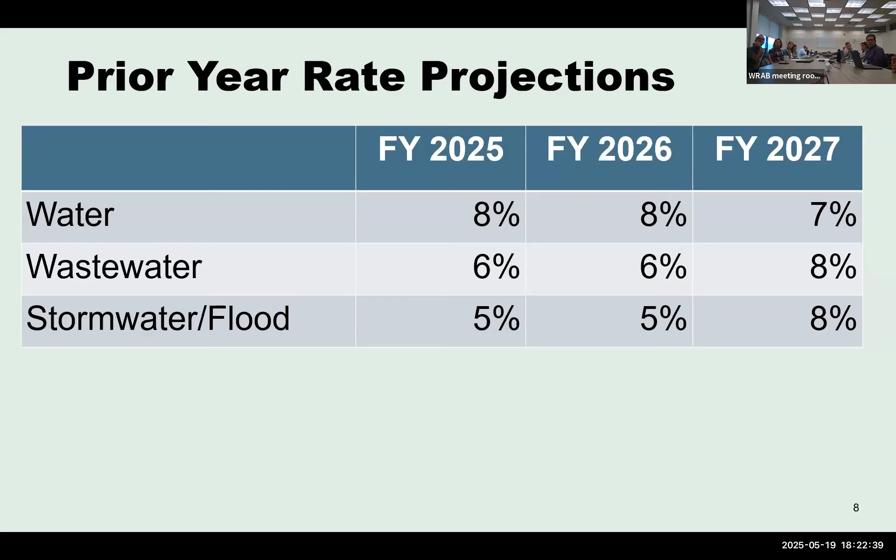All I had, are there any questions? You know what Golden's rates are? I don't know those off the top of my head, but I can look for that. Curious, since they're also.

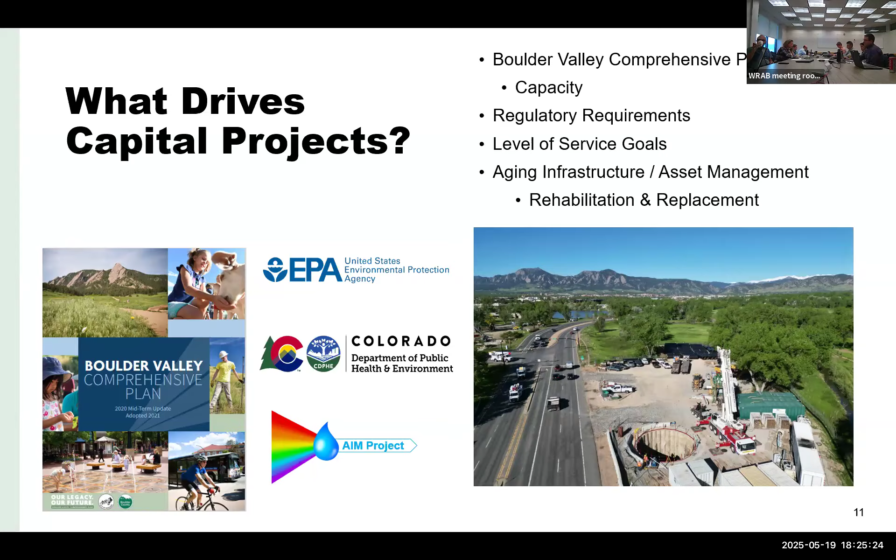The biggest driver for utilities specific projects is really that fourth bullet, related to rehabilitation or replacement of aging infrastructure based on our asset management systems.

So here we prioritize projects based on likelihood of failure compared to the consequences of failure. We also use a utility condition index score, or UCI, which you'll see on several of the slides later this evening.

It's really a cost weighted average of how much the asset costs and how much useful life is remaining, and we turn that into a percentage number. The nice thing this does for us is it helps us compare a wide range of different life cycles of assets and also costs, down to smaller diameter pipe all the way up to major components in a treatment plant. So it's just a way to try to normalize those costs.

As Joe mentioned, another way of thinking about this process is the traffic light concept. So we've got green, yellow, and red, where red is the area we want to address first because the impacts to the city are highest if there's a failure.

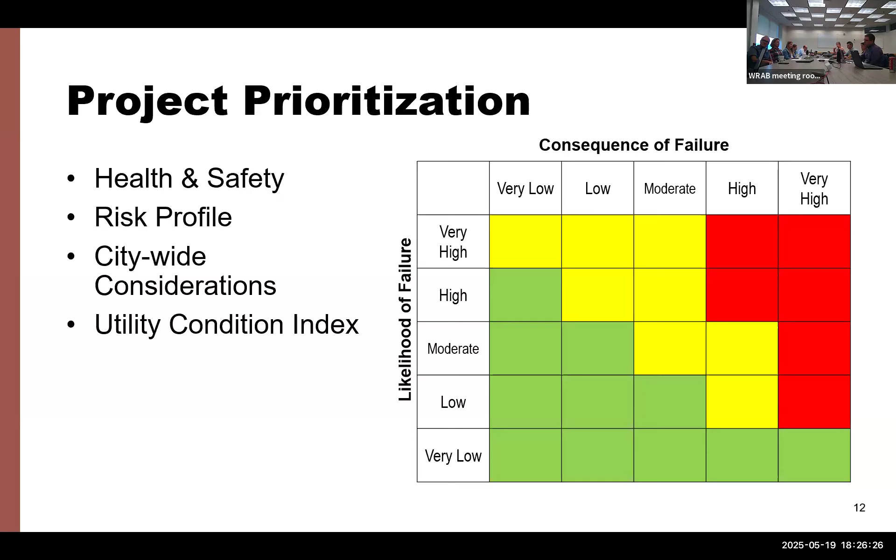The other big area we're always looking at is cost, and how we go through the cost analysis. Let me explain this figure a little bit, because it shows the various cost estimate ranges as we develop a project, or the class of the estimate - think about those brown boxes on the bottom of this chart.

Simply put, the more detail we have on a project, the more confidence we have in the cost estimate, and that reduces our plus or minus range. As you can see in this funnel, the blue decreases as our certainty and understanding of a project's cost increases. So in June, you'll see that one year recommendation for the 2026 program, but we also tie that into a longer view with a 6-year capital improvement program.

One of the things we're always struggling with is cost. As an example, the 63rd Waterline project we're going to see tonight - we did a first phase that we bid in the first quarter of 2024, and then added a second phase in the latter half of November 2024. Between that, in one calendar year, we had a 15% cost increase in the price of steel, and that was even before any of the current economic uncertainty we're seeing now.

So we're actively addressing this, and it's one of those ongoing debate items we have: how do we plan for larger construction contingencies for projects we're going to be bidding later this year and even into the future?

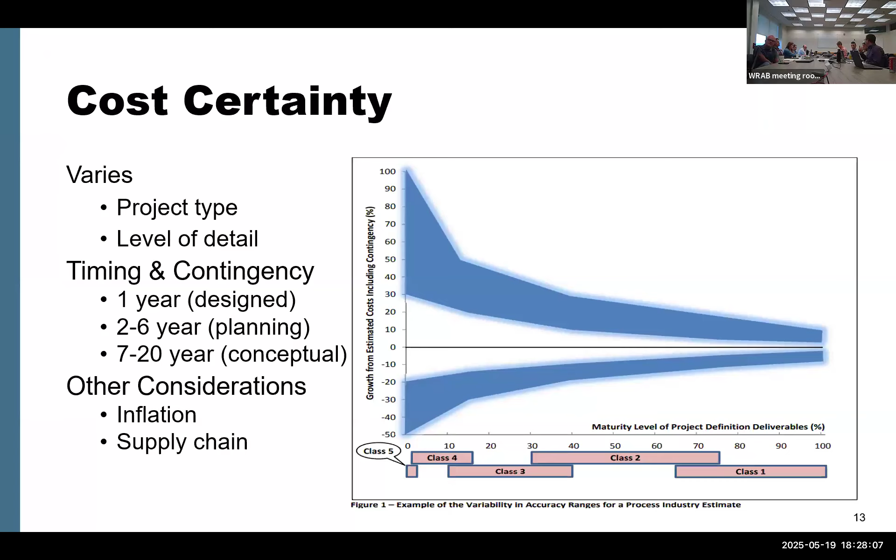So now, just before we get into the specifics on utilities, just as a very broad picture overview, I want to make sure if anybody had any questions.

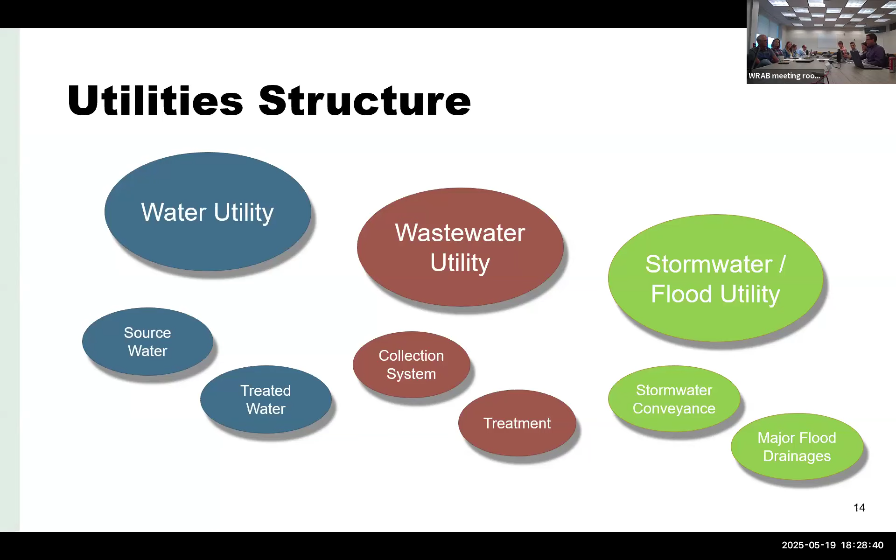Okay, so then the next series of slides, we'll stop after some of these major components. We've talked about the water utility, which is broken up into the source water and treated water system. We'll dive into a little detail on each of those, then the wastewater utility, followed by the storm and flood utility.

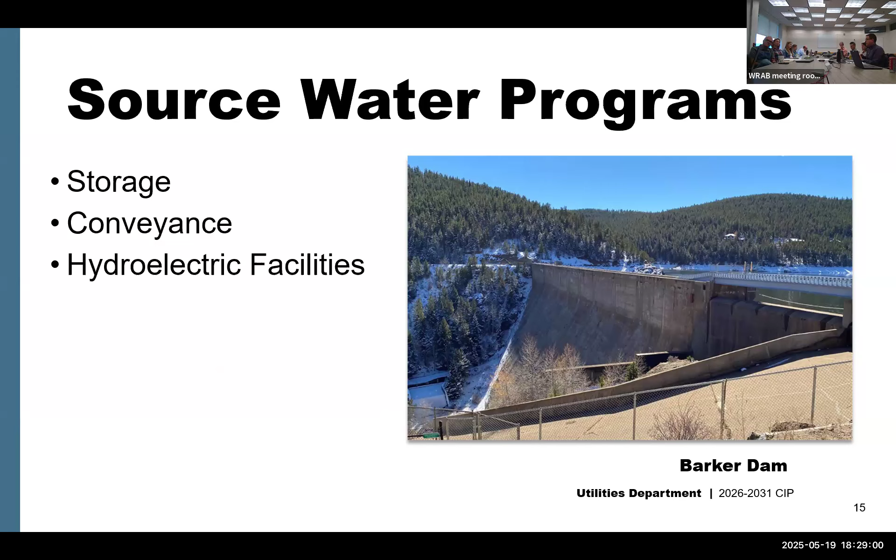So the source water system is everything that delivers water to the treatment plant. It's our storage reservoirs, conveyance either via river or pipe systems, and also hydroelectric facilities. So now we'll talk through that.

The source water system, as an overview, is made up of 15 reservoirs, and is roughly divided between 3 different sources. We have water that comes from the Colorado-Big Thompson, shown in green, that delivers water to the Boulder Reservoir Treatment Plant where we are today. Then we have 2 independent mountain water supplies in the North Boulder Creek watershed and the Middle Boulder Creek watershed. We'll step through each of those now.

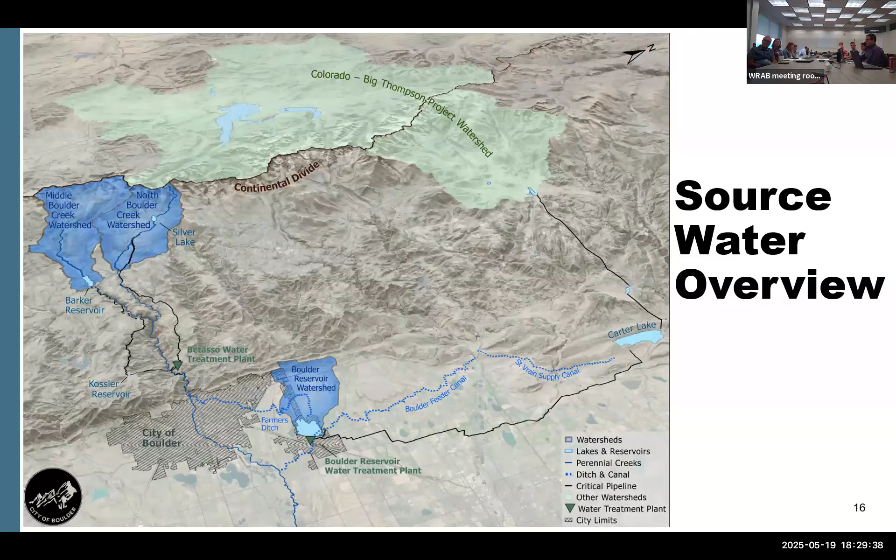So the western slope, or the water supply that delivers water to the 63rd Water Treatment Plant - this is the first example where you see that traffic light concept, where we have multiple sources to get water to the Boulder Reservoir Treatment Plant. We have the green, which is a relatively new Southern Water Supply Pipeline that we partnered with the Northern Colorado Water Conservancy District on. There's also a Boulder Feeder Canal that's a little older, in yellow, as our source.

Then the North Boulder Creek.

Question: What percentage of the water coming in here is going through the ditch versus the pipeline? Almost all of the water - we prefer to run through the pipeline for water quality reasons. We really do use the ditch more as a backup supply.

I see there is water running in it. There is water running in it because we're one of many partners on that ditch, and even the ditch as it runs into here at Boulder Reservoir - Northern Water, we're about a 50-50 partnership here at Boulder Reservoir. So they're bringing water in for some of their uses for Northern Water specifically. They have irrigation deliveries that they do for other water users in the area, and that's a lot of what we see delivered in the pipe is for our municipal use.

Is the pipeline used only for Boulder, or does it have offtakes for other users too? No, we're partnered with Left Hand Water District and a few others, and they take water off of it before it gets to us.

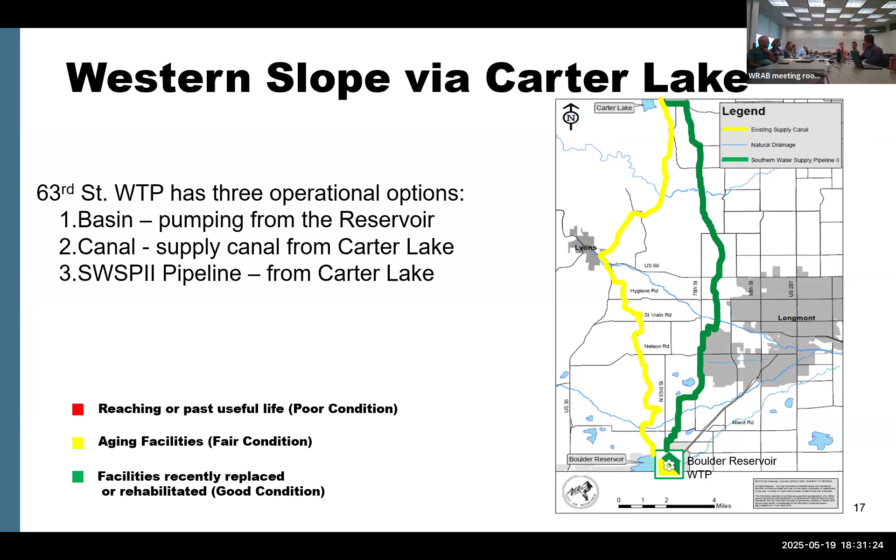So the North Boulder Creek system is a series of dams that collect water and cascade from our closed watershed to the Silver Lake Dam. Then we have a series of open channel and pipelines to deliver water to the Betasso Water Treatment Plant. We're also taking advantage of that elevation fall and generating some hydroelectric power. We've got several projects planned in the CIP up in the North Boulder Creek watershed that you'll see when we go into more detail.

Just curious, when you say past useful life, what's the useful life typically? It depends on the asset. For instance, some of these reservoirs are pushing 100 years old, and it's time for some rehabilitation. There's also the question of regulatory requirements changing, which is shifting our useful life on that. So we even have, as we'll look at in the Middle Boulder Creek system, some piping that we're actively working on.

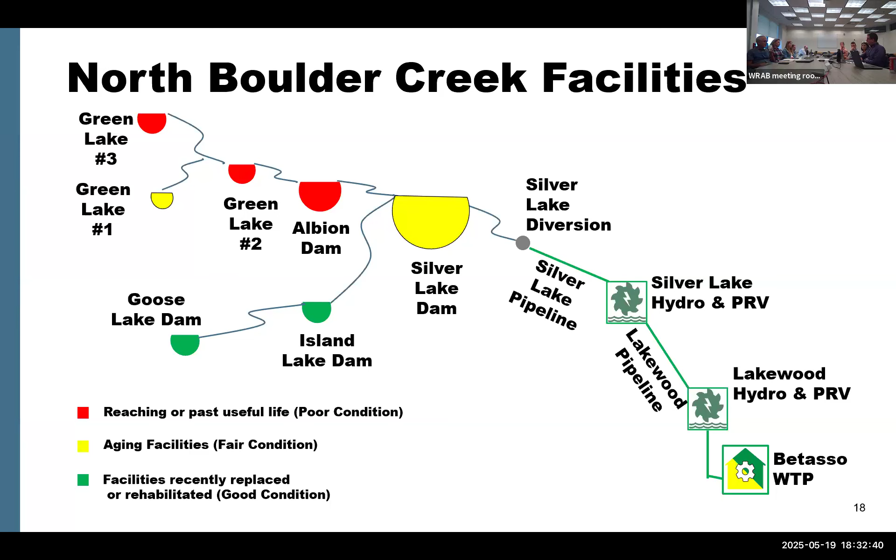On the Middle Boulder Creek system, you can see where we have the Barker Gravity Pipeline and the Boulder Canyon penstock. Those facilities are actually both over 100 years old. We're in a multi-year project on the Barker Gravity Line, where you can see the green and the red - we've got another 4 years and we will have completely rehabilitated that pipeline. Then we'll be pivoting to the Boulder Canyon penstock after that.

So there's this mix of, okay, it's really old, but is it still working for us? We've got definitely several things where we're doing additional analysis on those facilities. This is always a big juggling act. As we've talked about, we've got a lot of first page projects, and that's the biggest priority on that first page that we need to start getting after.

So that's the Barker Gravity System. Probably the biggest thing on the Middle Boulder Creek system is Barker Reservoir, the primary reservoir for that system. We're continuing to look at upgrades and coordination with the state engineer, making sure that reservoir stays safe.

There's still 4 years worth of work on the pipeline. It's roughly a 10-mile pipeline, and we're rehabilitating about a mile a year. We're doing that in the middle of winter because we need the water for the critical water demand season. So the team came up with an ingenious way to get in and work on it in harsh winter conditions and get it back up and running, versus taking it down to fully replace it, which would mean not being able to use that pipeline for multiple years.

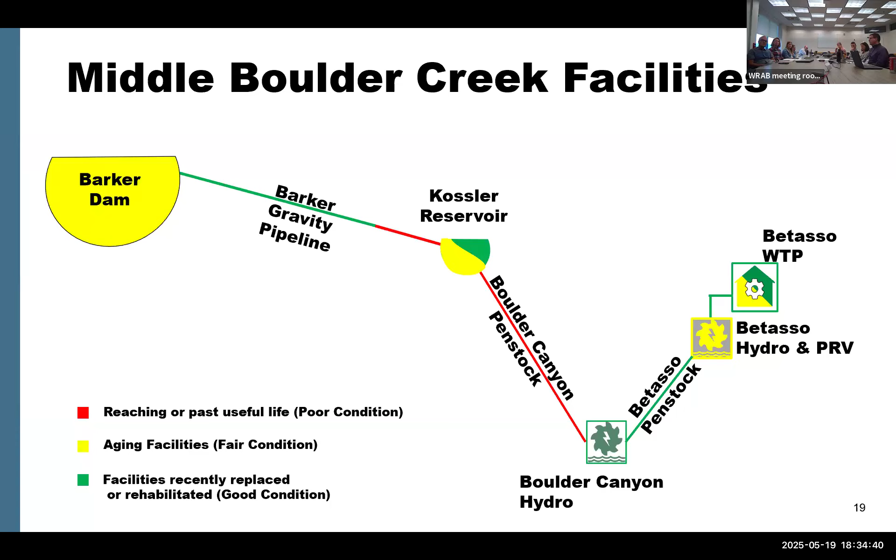We've done questions, but I just want to pause before going into the treated water system. Any other questions on the source water system?

I might make a comment while they're thinking of questions. On the first slide you showed, the Northern Colorado system, the pipeline that's relatively new, and then the canal system, those are Northern Water assets, not City of Boulder. So I just wanted to make sure everyone understood that. We pay into them, we have contracts with them, we pay into annual maintenance, so it's a little different than funding a big capital project on our own infrastructure.

Did we fund any of the original capital costs in that pipeline? We did, yeah. We have a contract for the initial portion of the payment and then the maintenance thereafter. So all the different users contributed to the capital costs originally, but it's owned by Northern. We're paying in based on our share of the capacity of that pipeline, for just the maintenance. We'd do the same thing for the capital cost and then also pay an annual maintenance fee. As part of the budget process, it varies, but we're coordinating with Northern on what those anticipated fees are.

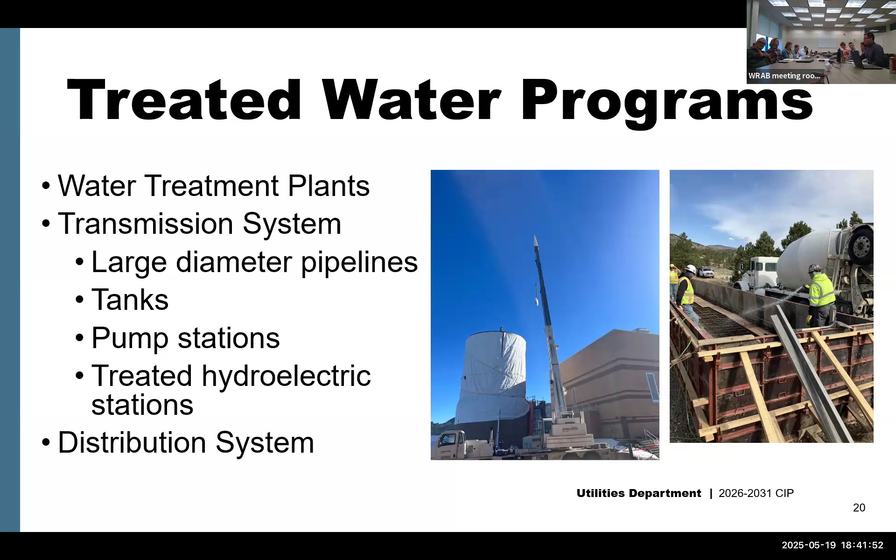From the treatment plants, we have two treatment plants here in the city. On the east end of the city, where we are sitting right now, is the Boulder Reservoir Water Treatment Plant, or the 63rd Water Treatment Plant. We kind of interchange the two names, and that's where we're bringing in all that water from the northern system. Then we have the Betasso Water Treatment Plant, which is west of the city at the Betasso Preserve. If you've been up there, the treatment plant's really on that end, and that's where it collects the water from the two Boulder Creek drainage systems.

I'll ask, the water treatment, this is to make it suitable for potable water? Yes, this is correct, this is potable water treatment. And then we'll talk about wastewater treatment here in the next series of slides.

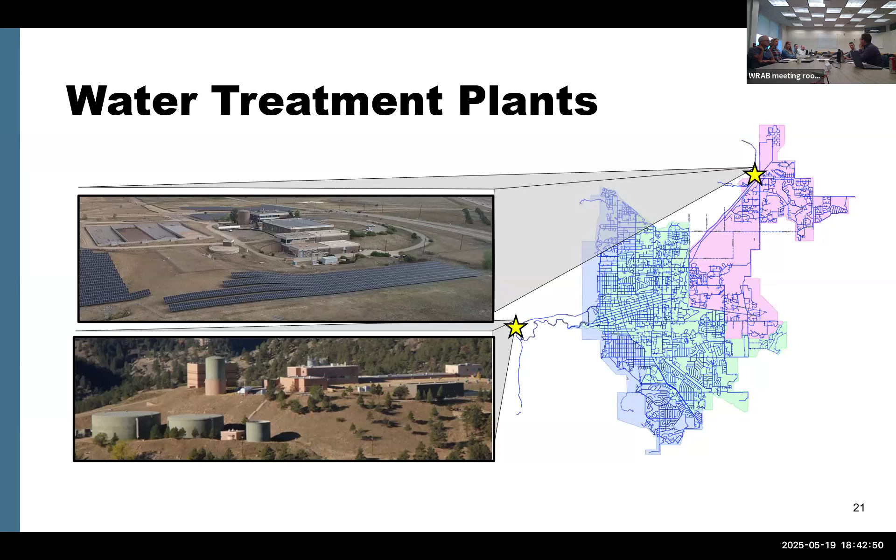So lots of things on this one, but it's the Boulder Reservoir Water Treatment Plant. A couple of big things to highlight: in the last years we did upgrade the main power and the high service pump station. You'll see those particular ones, in the middle of the slide, are now green because we've done that major capital improvement program. Then you'll see the areas in red that we're looking at, which is the backwash tank, the campus building and support facilities, HVAC, roofs, those sorts of things, and also the chemical feed system that are approaching the end of their useful life and it's time to do an upgrade. So we'll see some things here in the next year, and then some other things in the outer years in that 4 to 6 year range in the capital improvement program.

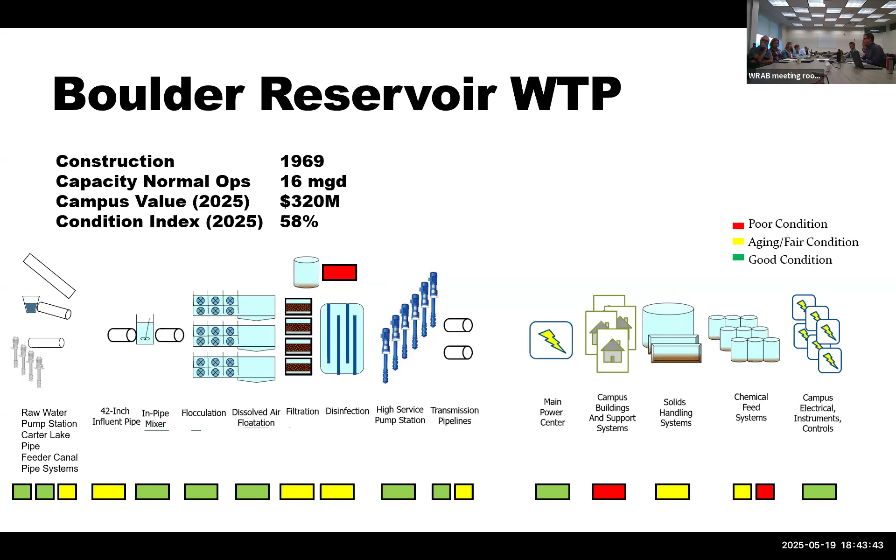Does the utility pay for those building upgrades? We do. We are responsible for the maintenance on our buildings, and we do work with the facilities team. So that would be one of those transfers that Steph talked about to other departments. We are still paying our bill to the facilities department when they are helping us out on projects like that.

What about the solar outside? What's powering this? The solar outside is a separate solar contract, a power service provider contract. So yes, it helps with this facility, but from the accounting side it's more going to the city and then kind of selling power back to the utilities department. Did I get that right, Stephen? That was certainly an area when we did this big electrical job - it was definitely a coordination issue on how we either maintain or what we have to do to shut power down to that solar field while we were doing all that work.

The Betasso Water Treatment Plant is in pretty good shape because we did some upgrades in 2017, but right now we're actively working with contractor consultants on some issues on the backwash tank, and we've just completed some work - that's why you see in that backwash tank that kind of red-green split. We're also looking at the disinfection system, and in a little bit later years in the capital improvement program we're looking at upgrading the chemical system.

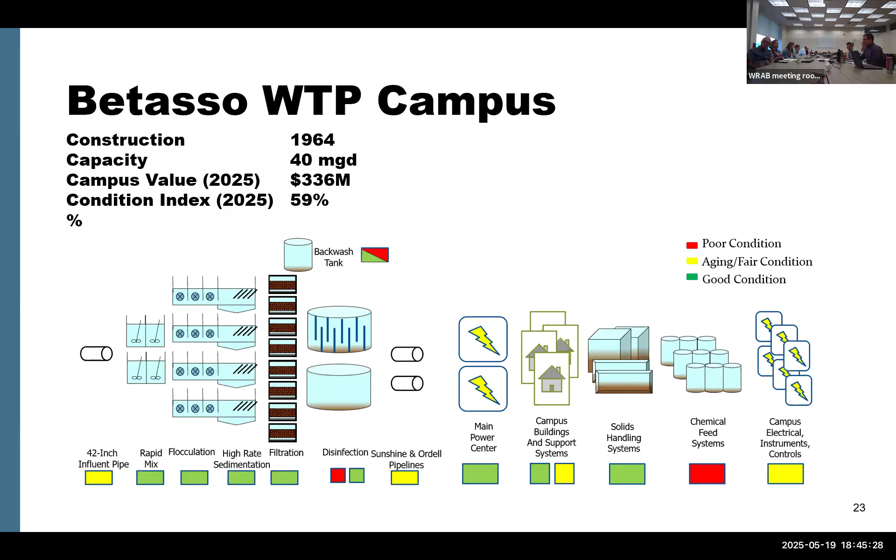Then the transmission main system - think the large diameter pipes - is really an area we're actively looking at right now. You look at the red box with the 70 miles of large diameter transmission pipes that we have. That's what we're going to look at tonight. This is our first big approach, really, after completing a transmission main study, toward capital or pipe replacement.

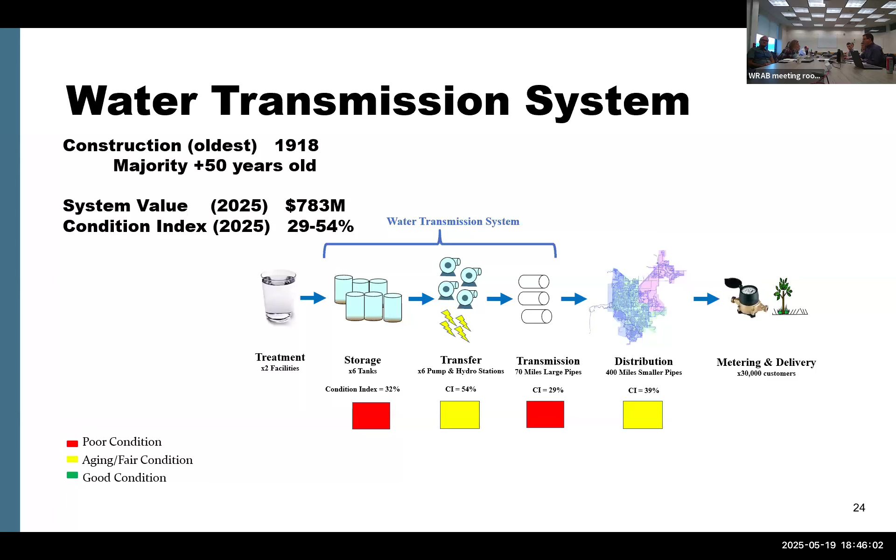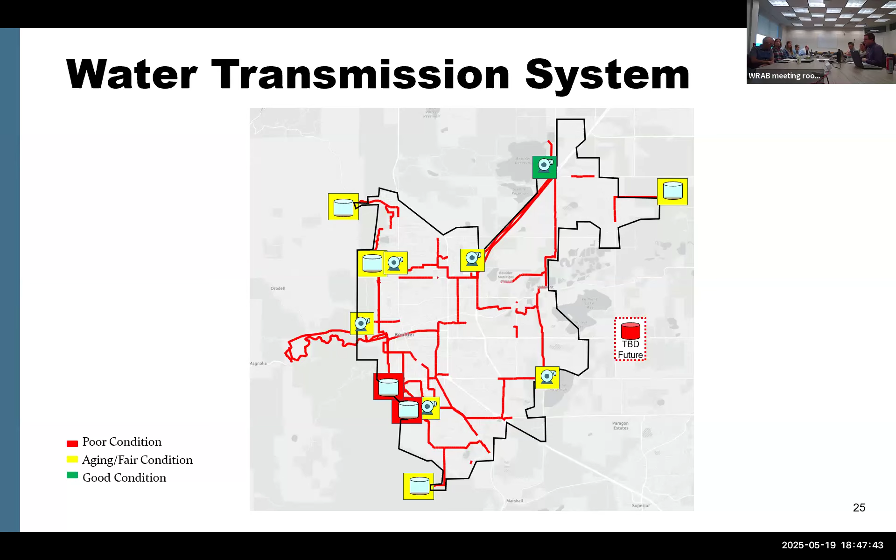I know we've been asking questions, but maybe any other questions before we move on to the wastewater system? Just maybe something.

Fires and ability - especially like in LA - the ability of the water system to deal if you really got a fire and you're trying to put out multiple mains, these systems aren't built for containing a lot of fire, right? That is correct. We have a system where we can produce a large volume of water, but it's a matter of - we've even worked with the operations folks on continuing to move water through it. But if we're ending with a Marshall fire or a fire in LA, the system is not designed to handle that sort of massive fire situation.

That would be looking at really going through and looking at upgrades to this entire distribution system. The biggest issue is you'd have so much water that you can only sit in the system for so long once you add chlorine - you'd age out all your water before you could get it out of the system. Thank you, Dan. That's the other side of the coin, that water quality issue - it's a non-starter. Yeah, that's why nobody designs that way.

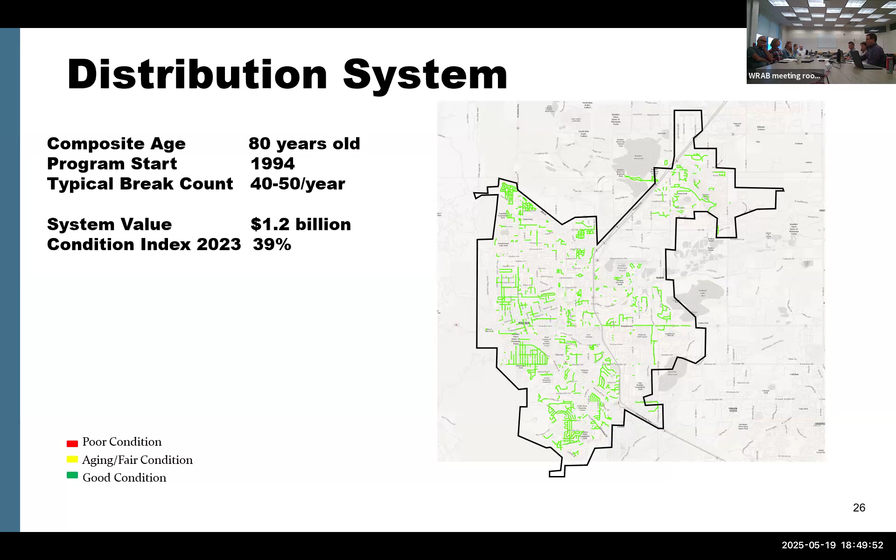So in the wastewater system, wastewater is really made up of two main components. It's the sanitary sewer collection system, which takes the sanitary sewer from everybody's home and delivers that for wastewater treatment at the Water Resources Recovery Facility, or what we call the WRRF.

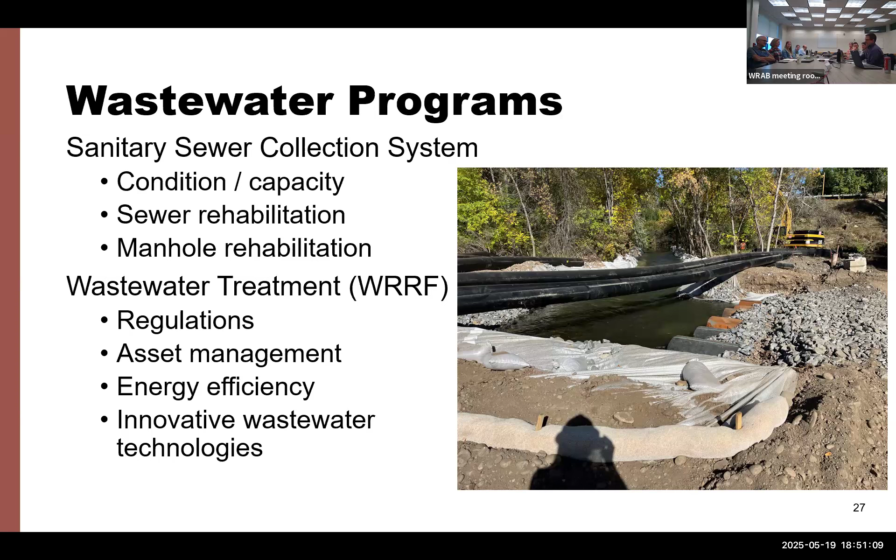We looked out—yeah, it was dark. I think we did the headlight projection. You got lost. It was a beautiful sunset. We were out by the western... no, we came here. Yes, we'll try to hustle tonight so we can get out before it gets dark.

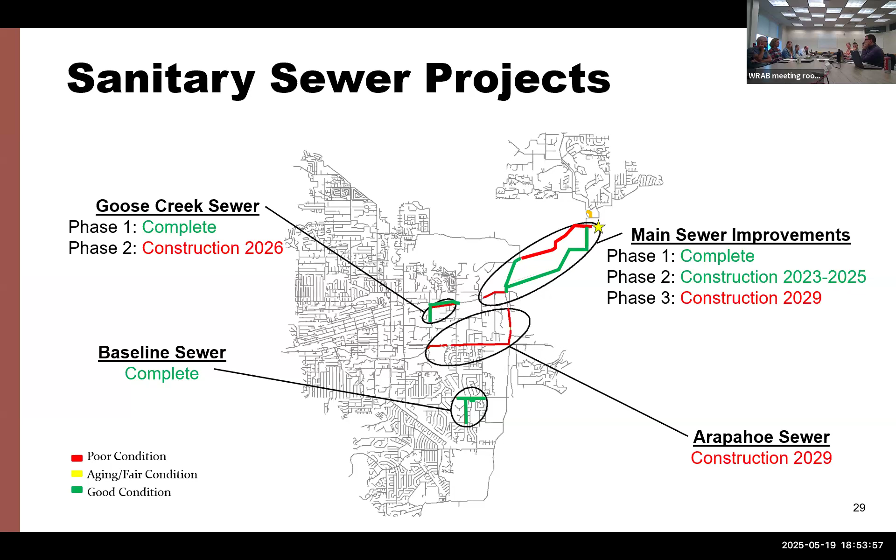When you make decisions about which neighborhoods and how to structure the phasing, is that based on some prioritization process, and also consideration of equity, where all the projects are happening, and traffic flow? We didn't mean to overlap our project with CDOT's—we didn't know CDOT was going to do that out here, so that was unintentional, but yes, we are attempting to coordinate. Particularly on the sanitary sewer lining program, a primary portion of that project is looking at what has the largest inflow and infiltration issue. But as we rolled out the equity program, we're overlaying that equity concept and making sure we haven't missed an area that hasn't been addressed from an equity lens as well.

So that's particularly on a multi-year project like this one shown here, we can look at it and ask, are we looking at it through that lens as well? The 94 distribution system that we started in 1994 has been scored by a point system since its inception.

That will be the water replacement. Yeah, and the whole time I've been here, we've done roughly 4 miles a year of pipe, and we did that based solely on the score. I didn't even know where the pipes were; they were just the score, and we could place those pipes.

That raises a really good point. There's coordination with the city roads, streets and roads folks, timing your project so it lines up with other projects happening in the same location, but also knowing what CDOT's gonna do, knowing what Xcel's gonna do. There's another level on that layer of priorities, an equity lens, and other citywide benefits we're considering. So we're trying to fit all of those pieces into making those project decisions.

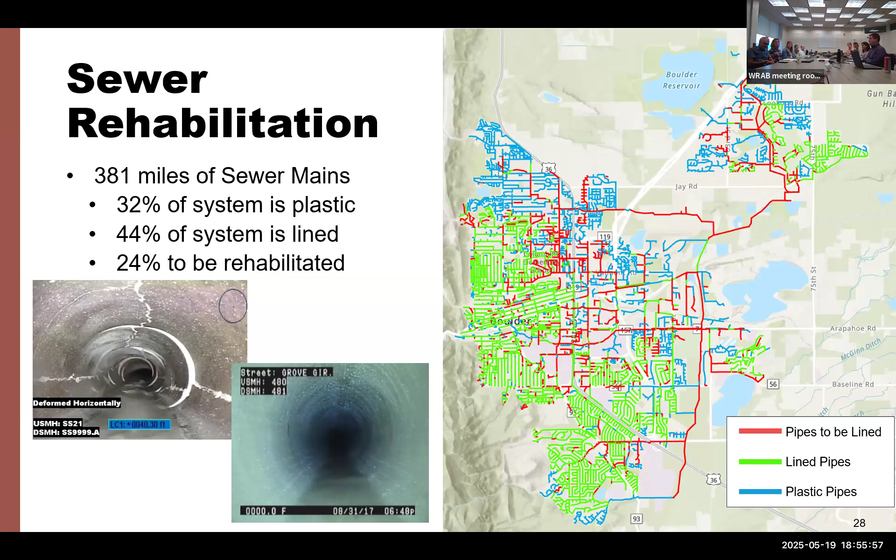So again, another one of those cases where we're looking at conditions and trying to pull levers. As Joe has talked about in the past, it's like the giant music mixing board we look at to decide which projects we're doing, when, and how that influences things.

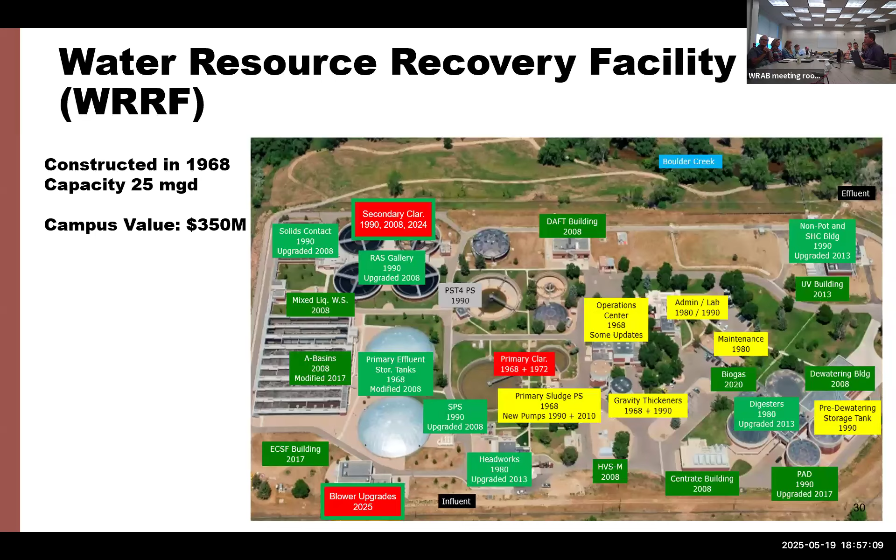One thing that's really stuck with me, I'm going to relay this before we go into the storm and flood program, is that when we did the comprehensive storm and flood analysis, a major consideration was: do we have the financial capacity to do it? Do we have the staffing capacity to do it, and the public willingness to advance a project? We don't want to be doing construction in one area year after year, because of that public capacity.

Did anything happen with the clarifiers last year? We were working on some of it, yes. Let me let Chris explain, since he's got more detail.

As Deputy Director of Operations, I can share a few things. We have primary clarifiers and then secondary ones. The primaries did get a fairly significant rehabilitation effort to extend the useful life of those assets. There will be more work to do in the future, but it was largely dealing with coating, coating on the submerged steel.

For the secondary clarifiers, one unit got replaced completely. There are two more that need to have their mechanisms replaced, which is what we're still planning to fund and pursue in the next couple of years. So 2 out of the 4 secondary clarifiers are in really good shape, 2 are not in good shape, but we have active plans to address that.

Then maybe pivot to the last utility area, the stormwater and flood program. It's made up of stormwater conveyance, thinking the pipes in the streets, stormwater quality, and the flood drainage way system. I really wanted to show this example, the rain garden at 15th and Walnut near the post office downtown. This project has dual benefits because it increases local stormwater drainage conveyance, but the rain garden also delays that water as it goes into the storm sewer system, so we get a water quality benefit as well.

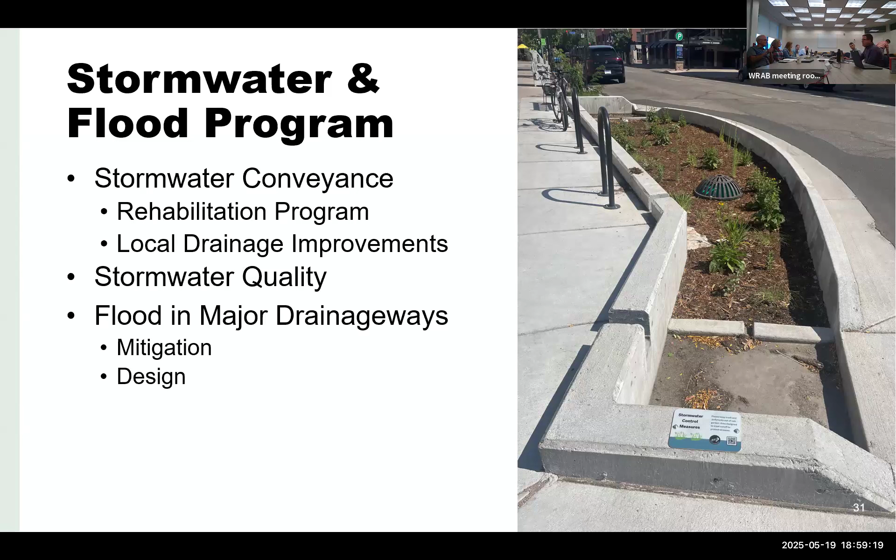So that's an exciting project that just came online recently. For those in Boulder, there are some private rain gardens, but this is the first utilities-supported one. We're looking at other areas for how we can do that, because it also involves a partnership with the property owner on some of the maintenance items and other things.

In the stormwater system, I wanted to show you a map of the diverse stormwater system we've got. One point is we're in year 3 of a condition assessment program where we're looking at the condition of all the storm sewer pipes, which has driven us into one of our local drainage improvement projects.

But the big point on the storm sewer system is our level of service. A lot of Boulder, in residential areas, is not able to handle that 2-year storm, or that small local storm, versus non-residential areas where we're looking at a 5-year storm. So going forward with upgrades to the system, both in capacity.

I'll have to get back to you on that. I can talk to my storm sewer team about the 5-year capacities too, and I'll bring that back in June. It varies from drainage area to drainage area. We have routine thunderstorms all the time in Boulder, but it's the bigger events where you really start to see flooding and accumulation of water that we're talking about.

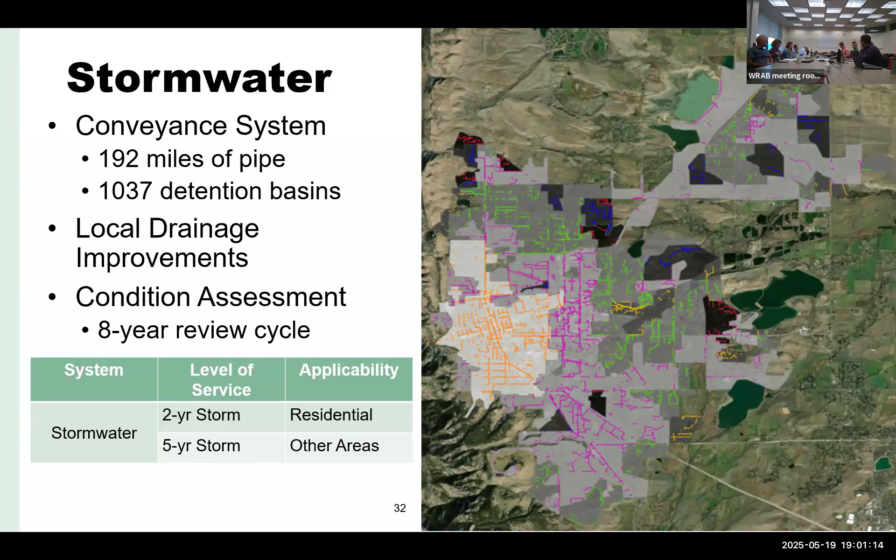Then the stormwater quality program works to address water quality within the city limits. The program not only seeks to comply with state water quality regulations, but to educate the public and improve water quality through better understanding of stewardship. That's led to things like the rain garden.

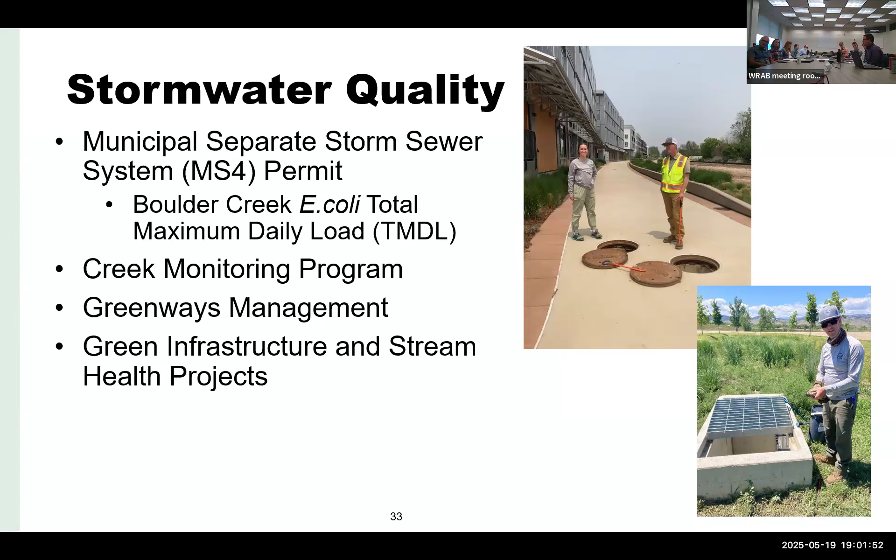We also address various water quality monitoring and special studies, such as in creeks. One of those is a multi-year implementation related to the E. coli total maximum daily load implementation plan on Boulder Creek.

Then the flood program is designed around those major floods, which either collect floodwaters created here in the city of Boulder, or come through the 16 major drainage ways that deliver water into the city, which we have to convey through the city.

But since Boulder was established before modern day floodplain regulations, there are physical limitations we have to deal with, even in some of these neighborhood drainages. We're putting in the largest practical stormwater conveyance that we can.

Is that the historic 100-year flood, or is that projected? Right now, a lot of our mitigation plans are based on that historic 100-year flows. We are looking at addressing larger flows, but again, it hits that practical limit just on the cost balance.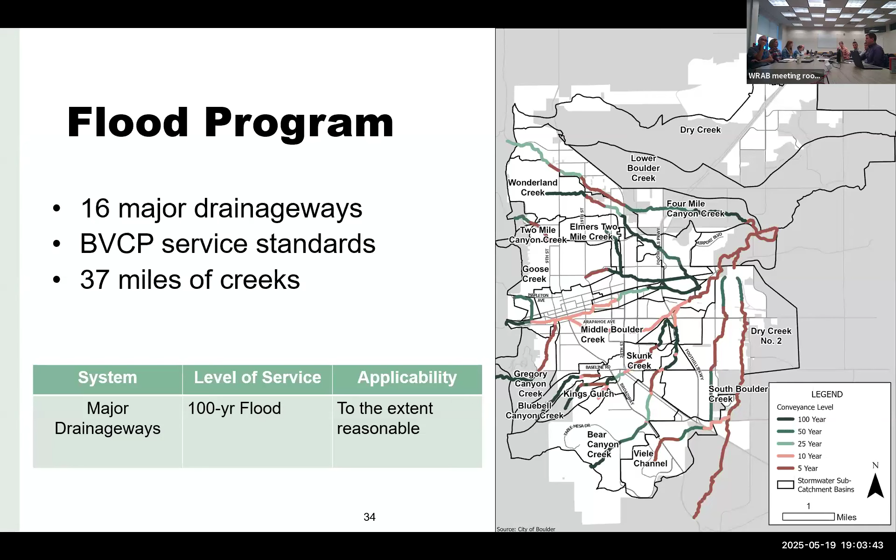With that, unless there are other questions on the stormwater and flood system, I'll hand it over to finish us off. So the city has a racial equity plan, and that topic just came up in the conversation a few minutes ago. We have the capital improvement program, and every department has a work plan, which could include operational items not related to capital projects. We develop a work plan every year and go through it, tagging things that are candidates for applying the racial equity plan and that racial equity instrument.

Some of the things we do in utilities are system-wide and benefit everyone. And then there are other things, like I'm really proud of the work the team did on the comprehensive flood plan, where we changed the way we prioritized projects with equity in mind. The way it was done systematically in the past used to point projects toward the most affluent neighborhoods based on property damage values. That wasn't really the intent of it, but it was all based on benefit cost ratio.

So this year's work plan has a lot of things flagged.

We have a billing system upgrade. We're looking at starting on water budgets and a rate study. Those are the types of things that are really a candidate for that approach in utilities. And the comprehensive flood plan, the water efficiency plan, the drought plan that the board weighed in on in the last few years are all things that the tools from the city's racial equity plan were applied and made a difference in the way we do things.

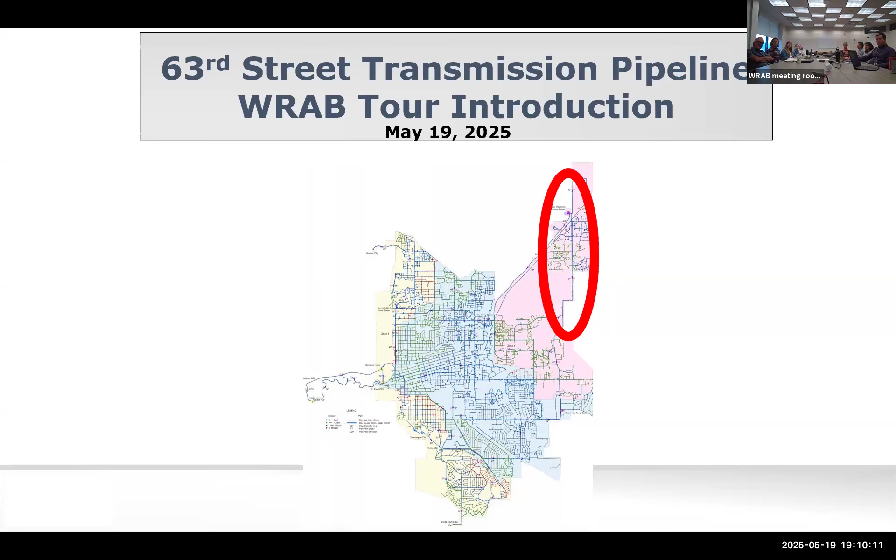Basically, to your question earlier, we really have a data-driven process that is risk-based and future-focused. So the projects that fall in that red category are of particular interest, but on top of that, if the pipe is too small for current needs or current customers and how we would wish to run the system, but also too small for the future. So you can kind of see how some of these things really stack up, and this red circle is one that stood out. So happy to have a good project here.

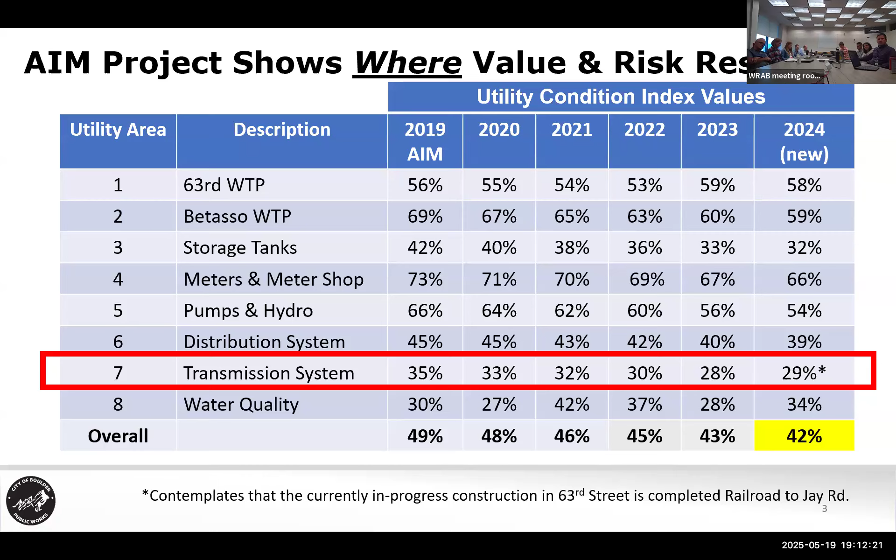And we're just really happy that we have progress to show tonight for this. But again, drivers are not just public health and safety, but there is a big component of this that is aging infrastructure driven.

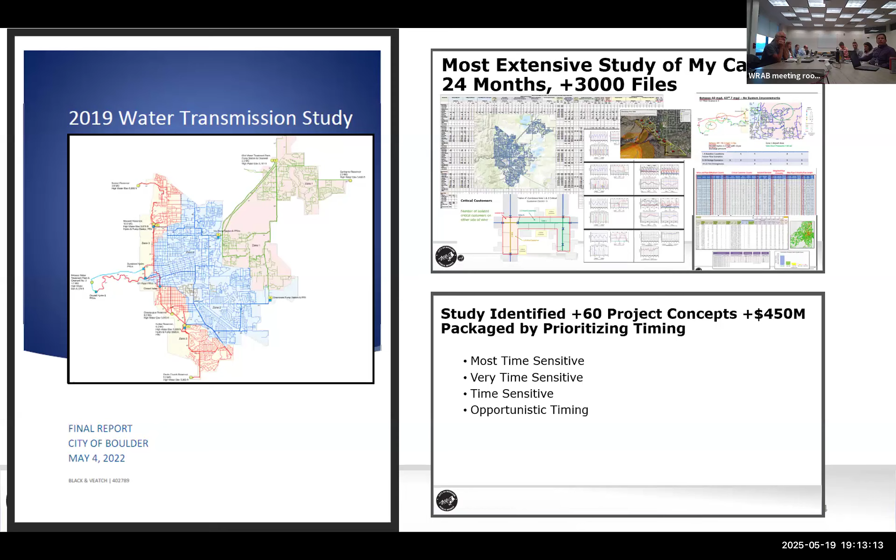Part of the data that went into this was our asset management program, the AIM program. That also led to a deeper dive because these systems can be so expensive and complex. You want to really be certain about the outputs and inputs going on there. For the transmission study itself, there was an extensive 2019 water transmission study, the most extensive study of my career, taking more than 2 years. There were over 3,000 files, hydraulic modeling, you name it. Those are just examples of the type of data, but when we say it's data driven, there's quite a lot of data that goes into coming up with a recommendation.

Reinvestment on the transmission system and the results of the transmission study is active right now. We looked at the cover slide with the red circle, but there are 2 others that have also been active and are anticipating construction in the CIP that we'll discuss more as a team with you next month. The Kohler tank has a key pipeline that goes from the tank itself down to Broadway, near the NOAA facility area of town. These are really critical pipe systems that convey large volumes of the city's water use. Related to that, once the pipeline gets to Broadway, it goes along Broadway, which is part of the same pipe vintage and is also in need of upsizing. So that's the steps that have been active and engaged to date.

I can take over from there. The number 2 you see up there is actively being designed as we speak, one of the projects I'm working on. We're at roughly 90% design on that, and I think we'll be bidding it this coming spring. That's estimated to be around a $12 million project, and it'll be 2 24-inch pipes from Kohler tank all the way to Broadway.

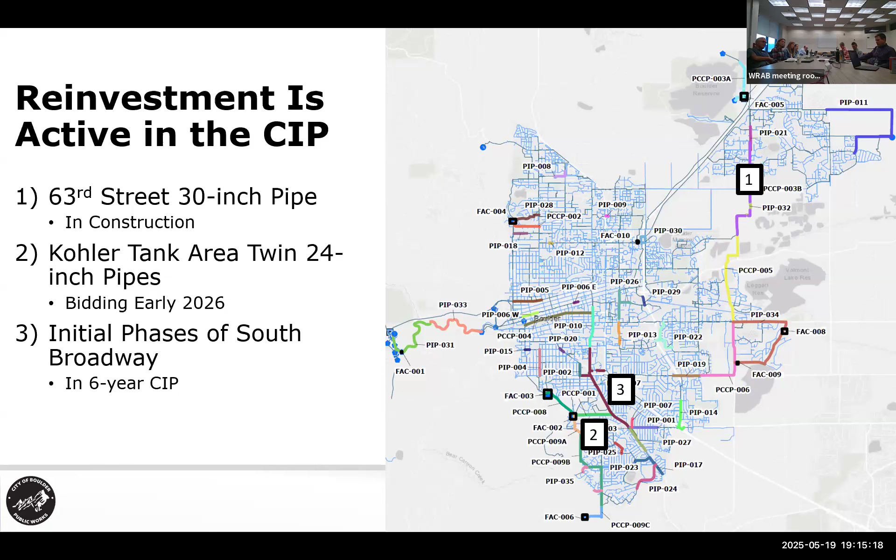And then number 3 is hopefully going to be in design by the end of '26, possibly. So that's our near-term plan for the transmission system. Currently, we're in construction out here. I'm running the project on 63rd.

This is our current progress. Just a quick overview: we did a section of 12-inch pipeline because it was in really bad shape. I thought when we shut off the big pipeline to hook other pipelines and things to it, it would break, and we were right, because every time we got close to it while replacing it, it broke. It was in terrible shape. So we started by doing the 12-inch pipeline from roughly the railroad tracks out here, just shy of Twin Lakes Road. That's on the east side of the road, and it's all paved back, and that's where traffic's running right now.

But we did that first, and then we came in and started on both ends of the 30-inch and are working our way towards the middle on that. The fat lines are what we've completed to date, and the dash lines are what we have left.

We're a little further on the fat line on the left-hand side now, but the dash line you see from Jay south to Boulder Creek was the project that Chris talked about, which we originally bid as phase 1, from the railroad tracks to Jay, and then we were going to bid the second project.

I talked to our contractor out here. They're doing a good job. They're the premier contractor of large pipe in the state. They said they'd hold their prices even though there was that 15% price increase.

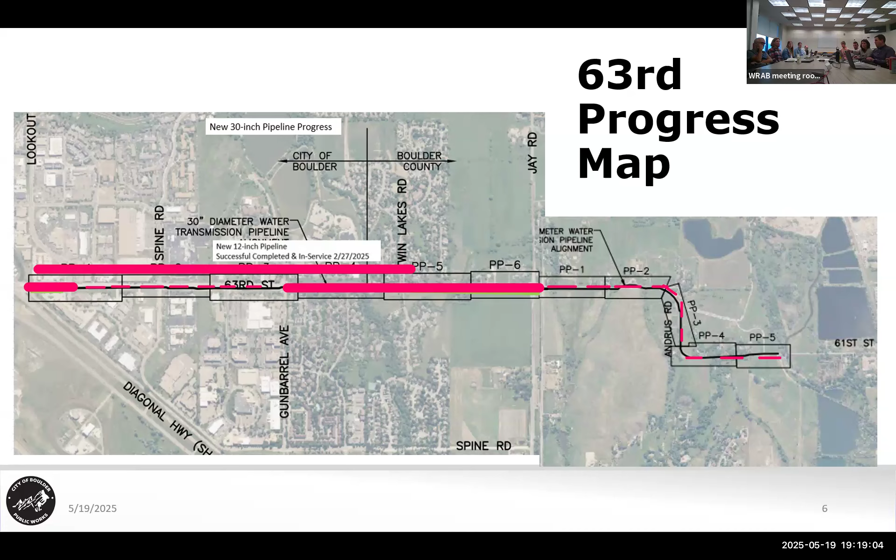Is there already a line running along here that you're replacing? Yes, this was a 24-inch pre-stressed concrete pipe. The problem with pre-stressed concrete pipe is when it fails, it fails catastrophically — it blows up into pieces, and fixing it is really difficult. That's why we went after this pipe first, since our consequences of failure were extraordinarily high.

We're replacing it with 30-inch steel, so we've upsized it and gone to a better product. The destination of this specific project — where is it ending? It'll be at Boulder Creek at this point, but the ultimate project would go all the way to Cherryvale Pump Station, technically, though that's many years in the future. Right now we're ending at Boulder Creek because there's a transmission line that goes up towards the airport, and that gets us a nice piece of flow we can end at and move on to the next priority essentially.

Cherryvale's near the Baseline Pump Station — yeah, this is the main pipeline for zone one. And to draw a circle around the whole conversation, once this plant's water finds its way to Cherryvale, it's also hydraulically connected to Kohler, which is that twin pipe. So water has to be transferred over lots of long durations, long distances.